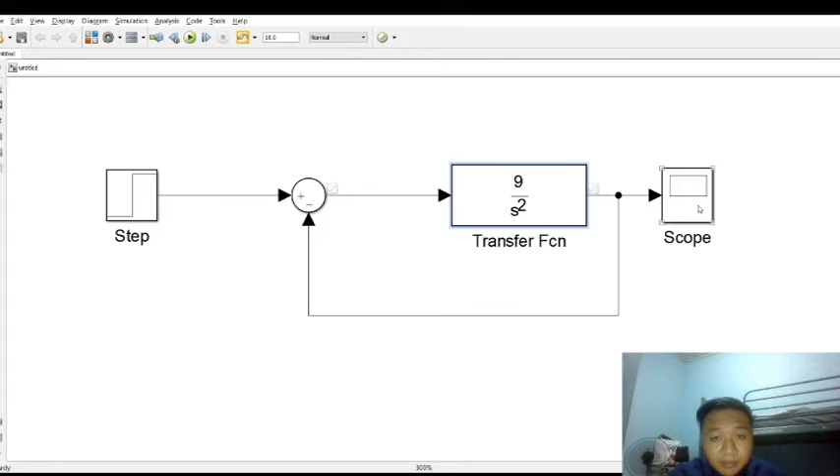Now we run the program, then we click the scope to view the output.

The graph has an equal shape like that. Okay, the transfer function scope is done.

Next we go to MATLAB.

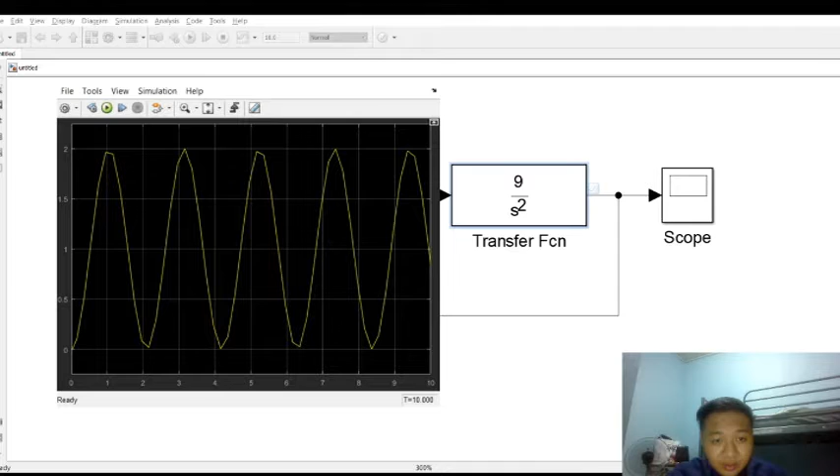Now in MATLAB we want to find the locus, the transfer function feedback, locus, step response, and step info. First of all, we want to start.

We type t equal tf for the transfer function, with numerator 9 and denominator 1, 0, 0. Okay, this is the transfer function.

Next, for the feedback, we use f equal feedback(t), using t because that is our transfer function, with value 1.

Okay, this is the feedback. Next we go to our locus. We type the rlocus command, feedback, to find the root locus of f.

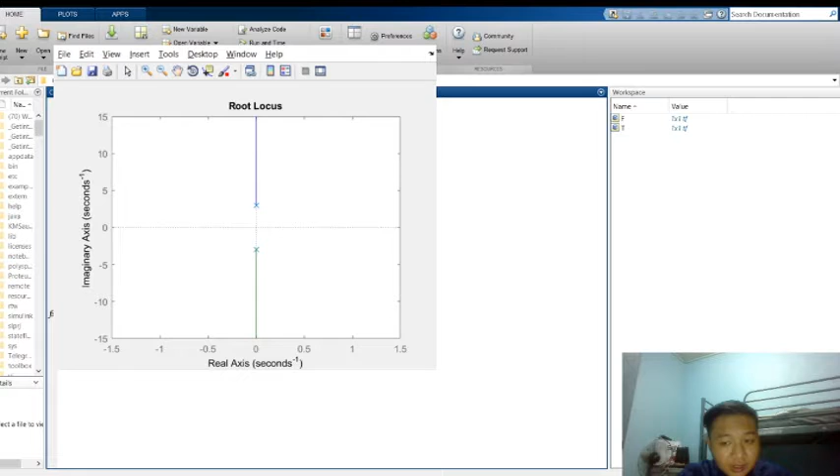Okay, now this is the locus. Next we go to the step response.

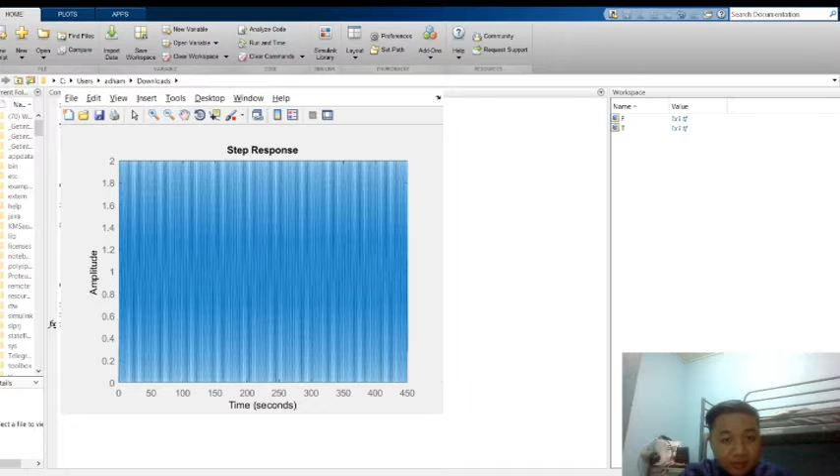This is the graph of the step response, and then we look at step info. We type stepinfo(f).

This is transfer function 1, and this is the answer from step info.

Rise time is 0.3473, settling time is NAN, settling min is 1.0851e-15, settling max is 2.0000, overshoot is 100.0000, undershoot is 0, peak is 2.0000, and peak time is 1.0472.

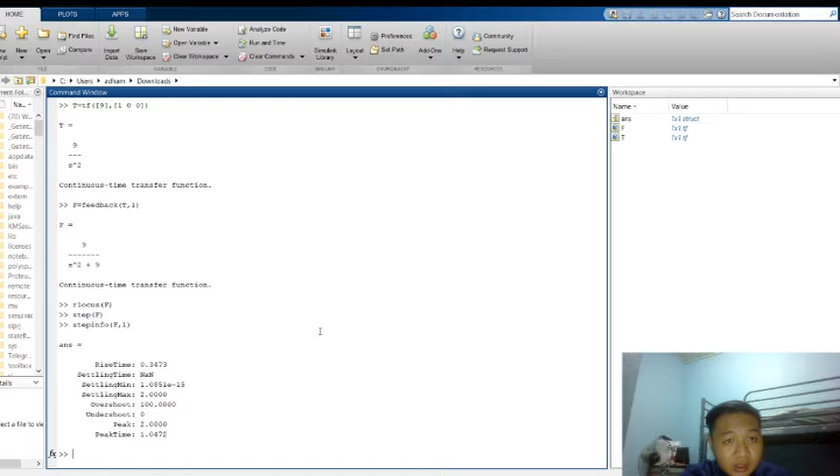Okay, thank you, that's all for me on transfer function 1. Next, we go to transfer function 2.

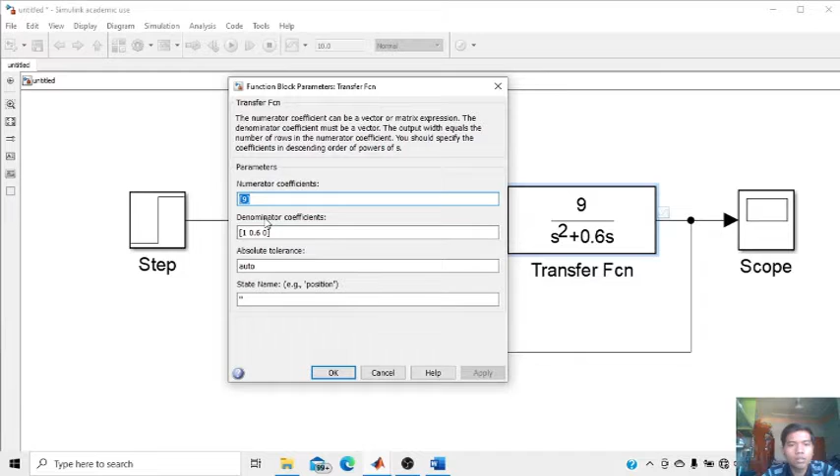In the numerator column, we put 9. In the denominator column, we put 1, 0.6, and 0. After that, we apply it and confirm.

To find out the step response, we run the block diagram, then click the scope.

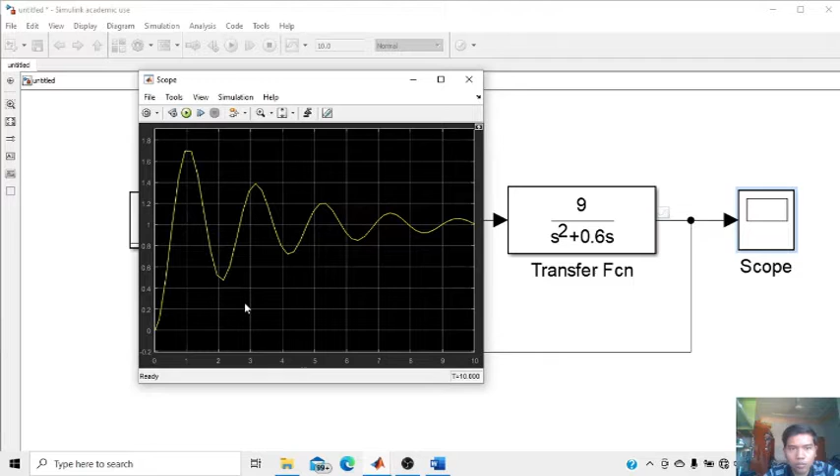After that, we find out the step response without the PID controller.

We type t equal TF with values 9 and 1, 0.6, 0. Then feedback(t, 1), and step.

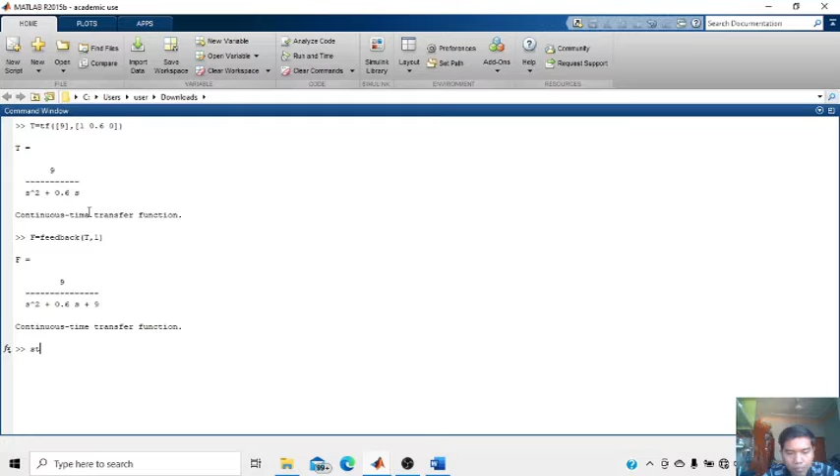We put grid on, and then we look back at the step response. This is the step response for transfer function 2 without the PID controller.

After that, we need to find out the overshoot, settling time, and steady state. To find the overshoot, we pick the peak response, and we can see the overshoot is 72.9.

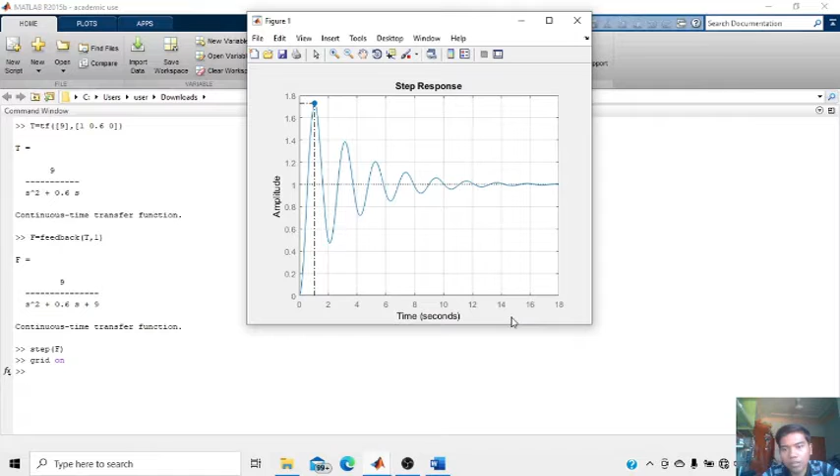To find out the settling time, we pick the settling time point. Settling time is 12.8 for this transfer function, and steady state for this transfer function is 1.

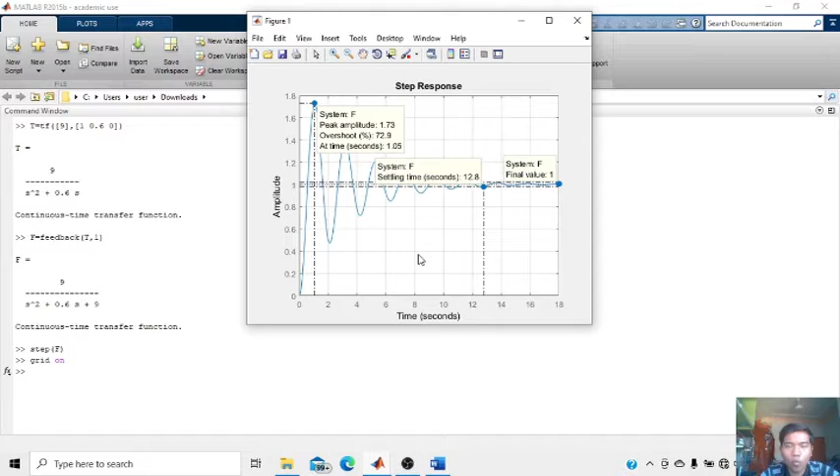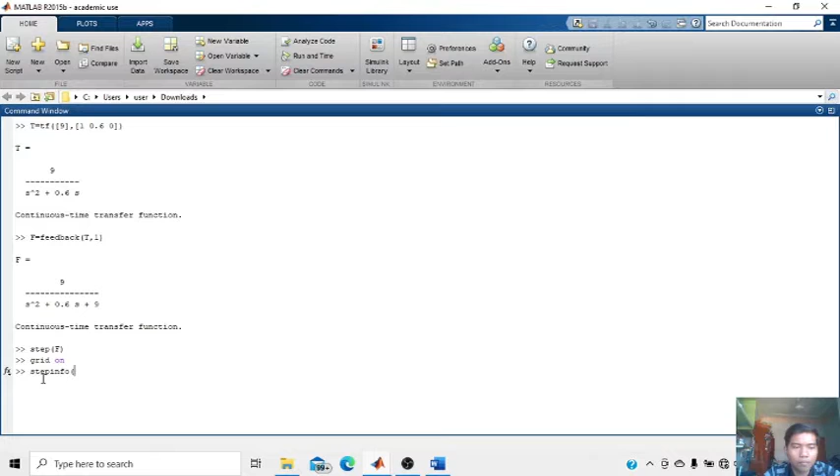But we can easily find the info without picking like that, just by using the stepinfo(f) command. Then we can see the settling time is 12.7910, and the overshoot is 72.9156.

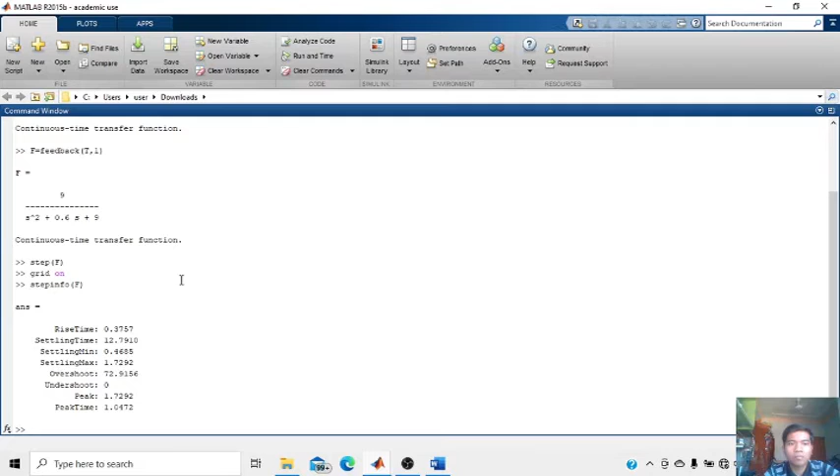Okay, for activity 6, we must try different values of KP and observe the overshoot, settling time, and steady state based on the graph.

First, num equal to 9, denom equal to 1, 0.6, and 0. GP equal to TF(num, denom), H equal to 1, M equal to feedback.

Then step(M), and we turn on the grid.

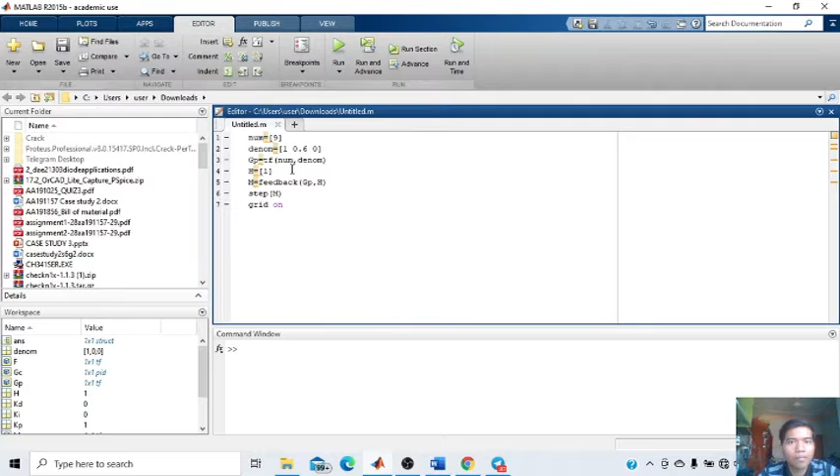After that, we run the command to find out the step response. This is the step response for transfer function 2.

The overshoot is 72.9. The settling time is 12.8. The final value, the steady state, is 1.

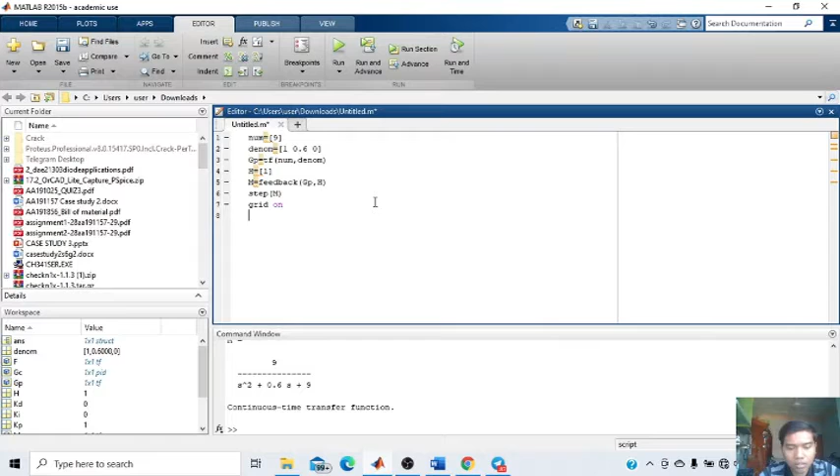After that, we change the KP value. We put the KP value to 0.5, KI to 0, and KD to 0. GC equal to PID, KP, comma KI, comma KD.

After that, MC equal to feedback GC, GPH. Then step MC, grid on. We run the command back.

Okay, this is the step response for transfer function 2 with the KP value is 0.5. As you can see, the overshoot decreased to 63.8. The settling time is 12.3 seconds, and the steady state is still the same, 1.

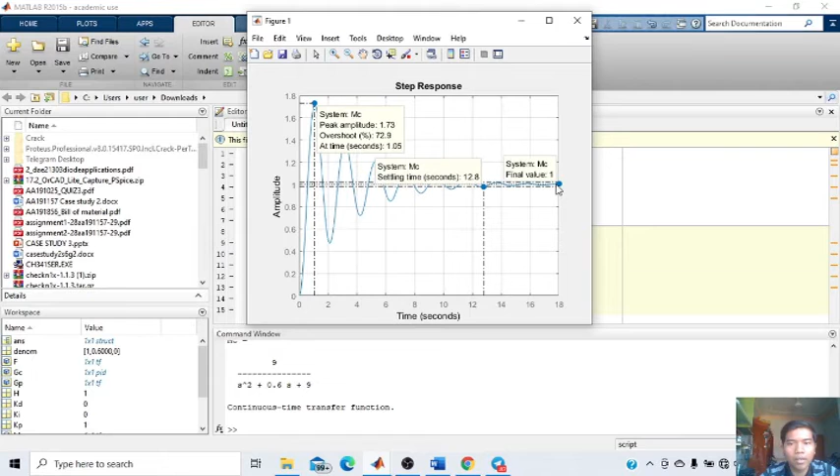Let we change the KP value again to 1. We run it back. Turn on the peak response, settling time, and steady state. Find out the overshoot, settling time, and final value. For the transfer function with Kp equal to 1, overshoot is 72.9, settling time is 12.8 seconds, and steady state is 1.

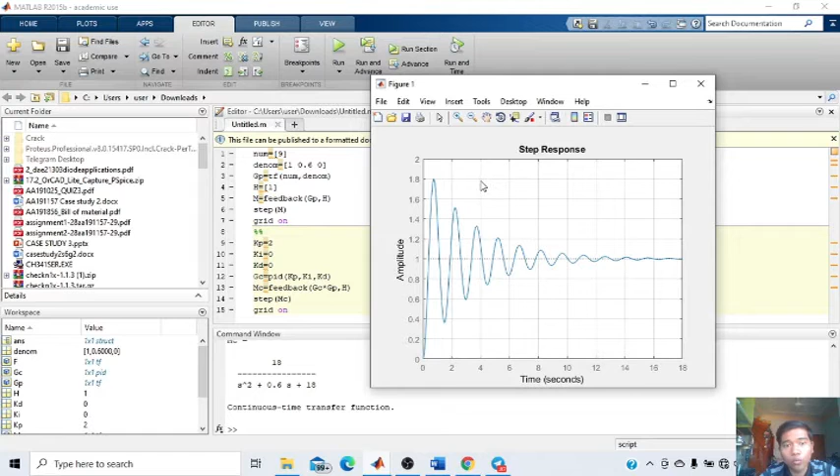Next, we change the value to 2, and we run the command back. This is the step response with Kp equal to 2. We turn on the peak response, settling time, and steady state. For the Kp value equal to 2, the overshoot becomes 80%, and the settling time is 12.7 seconds, and the steady state is 1.

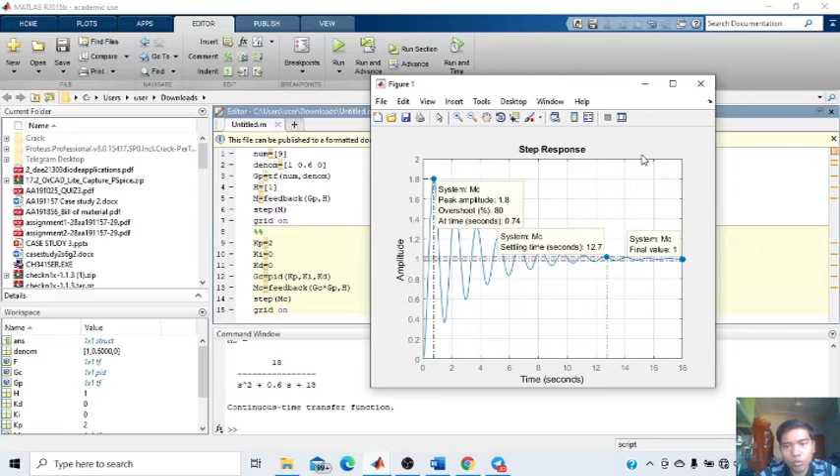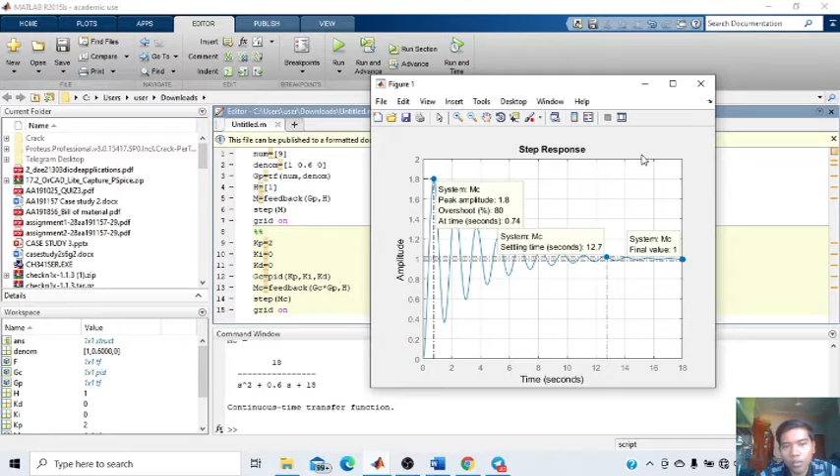Now for transfer function number 3, it is 1 over 0.8 s squared plus 2s plus 200. For the transfer function, it must be on a plant. So to find the graph, we must highlight this graph and select the data inspector. Then we run the circuit, and we get the graph, and this graph is underdamped.

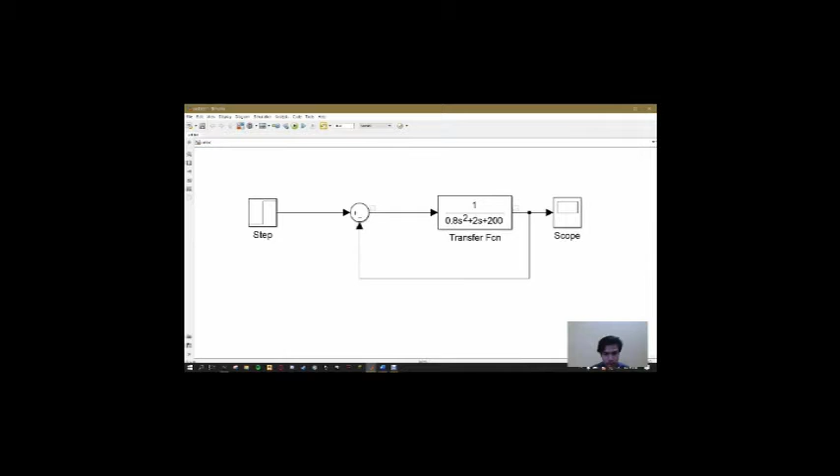Next, to find the original closed loop control system, the first one is overshoot. We will get 78%, and then for the settling time we get 3.02 seconds, and the final value is 0.00498.

Next, the PID control closed loop control system. For transfer function number 3, we use Kp equal to 40, KD equal to 20, and KI 0.1, 0.2, and 0.3.

The overall for KI value 0.1, 0.2, 0.3, we don't get any overshoot value, but the settling time for KI 0.1, we get 0.009. KI equal to 0.2, settling time we get 0.004. And KI equal to 0.3, we get 0.003. For the steady state, all KI equal to 0.1, 0.2, and 0.3, we've got 1.

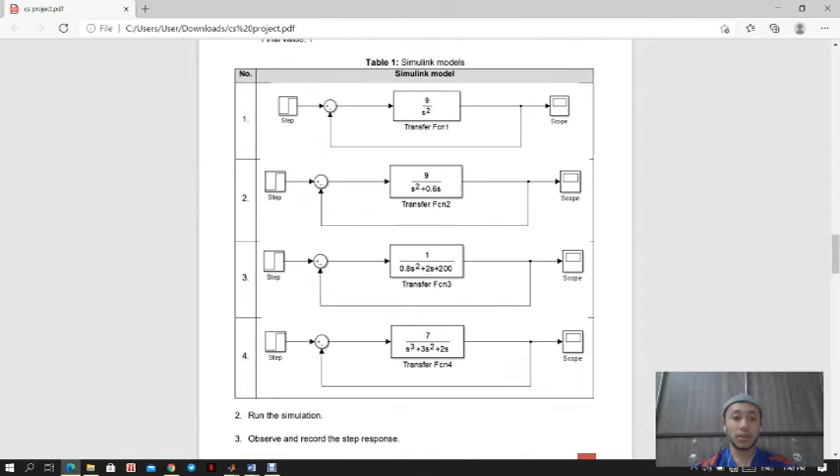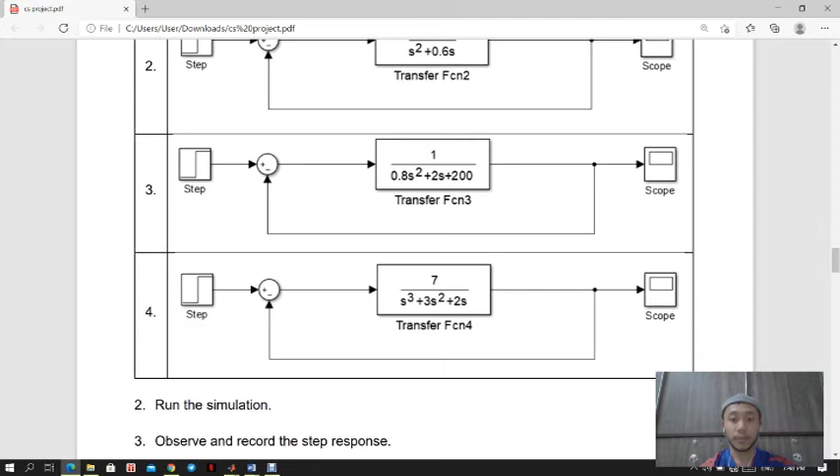So here we can see the block diagram of transfer function 4. Okay, and then we look at the Simulink model and we write the transfer function here in the box, and the next thing we must run the simulation.

Okay, after we run, we click at the scope to see the step response. So the result is like this. This shows that the graph is unstable. Tidak stabil lah, unstable. You can see here.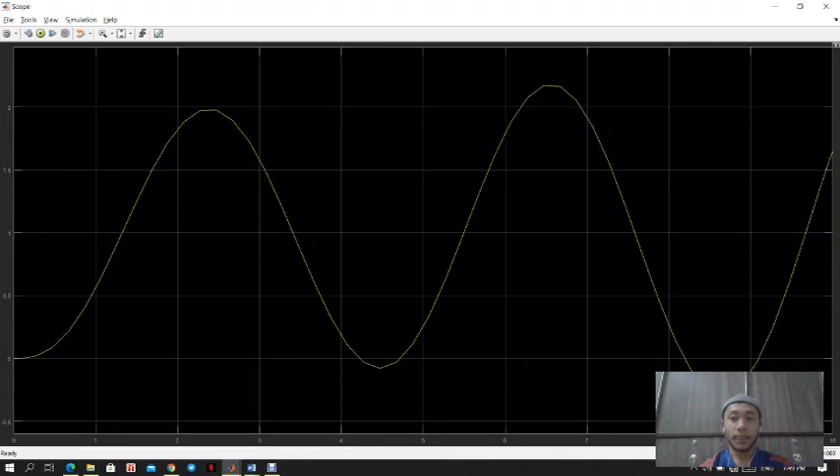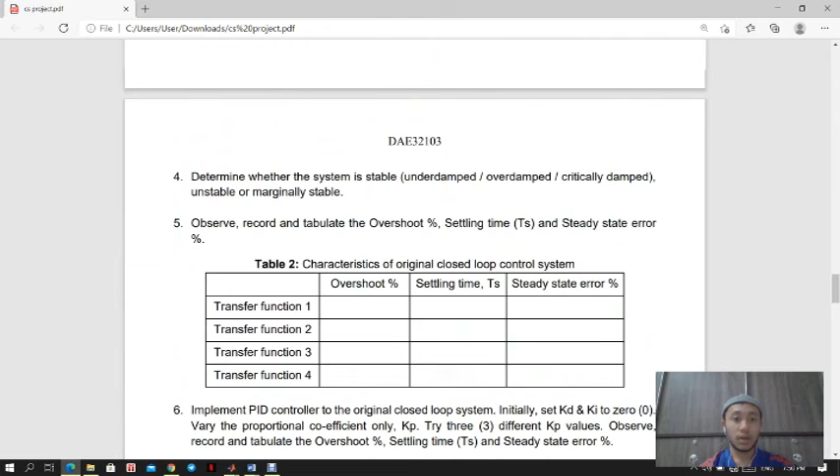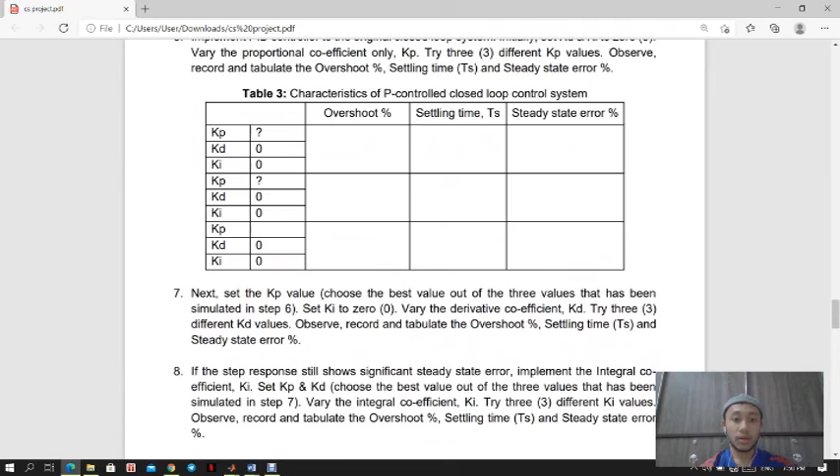Next, we move to the characteristics of the original closed loop, P control, PI control, and PID control. Okay, next we look at the command.

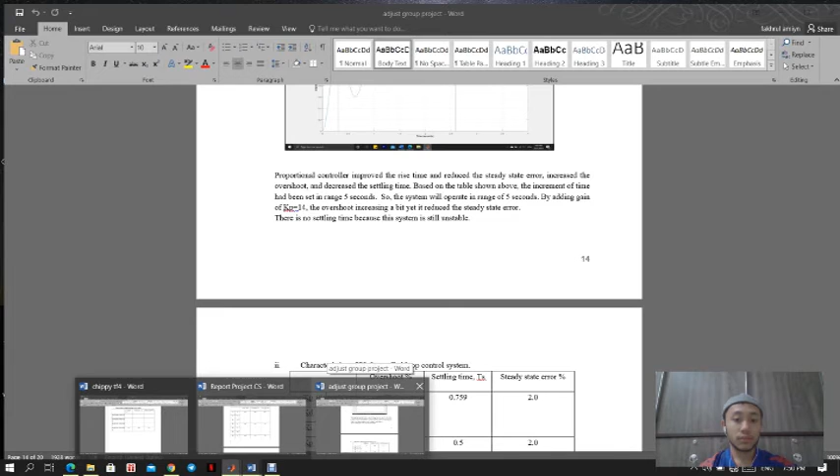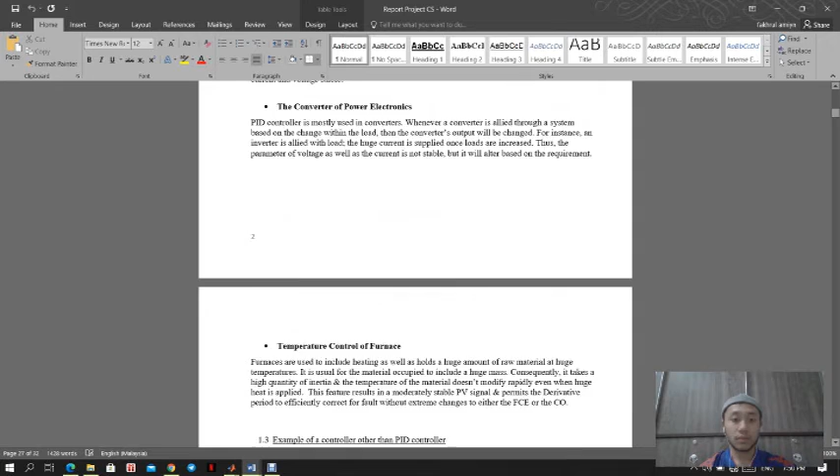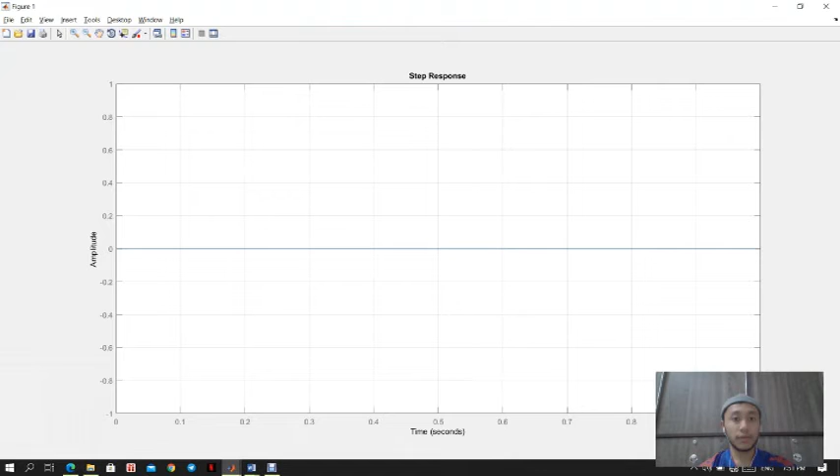For the characteristic of the original closed loop control system, we just run it. We can see this infinity value. Then we record in the table of transfer function 4, infinity.

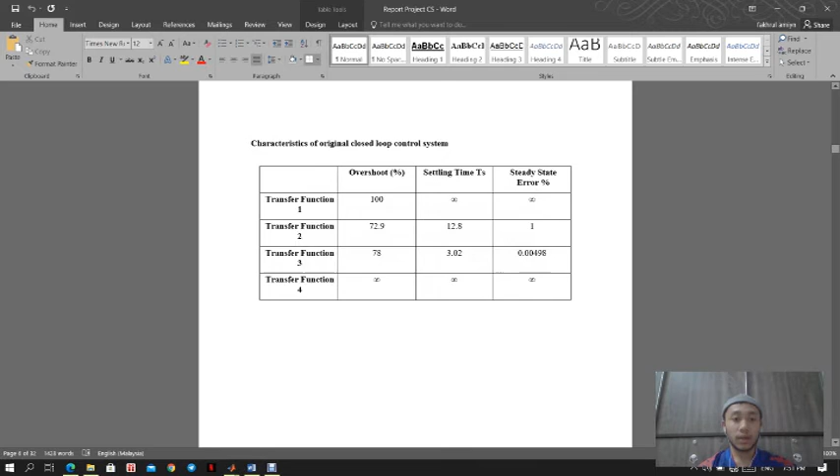Next we move to the characteristic of the P control. We put the value of transfer function 4, here is 20, 40 and 60 for the P control. So this is the value.

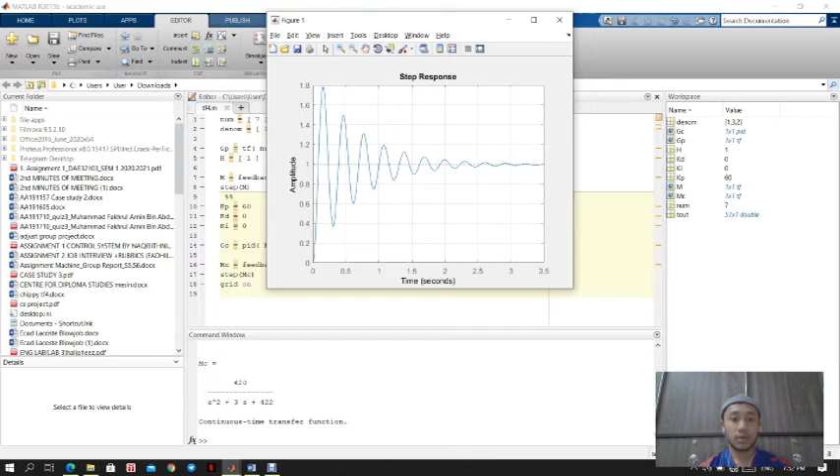Then we change to 40, then we run, we got this. And 60 we run, we got this.

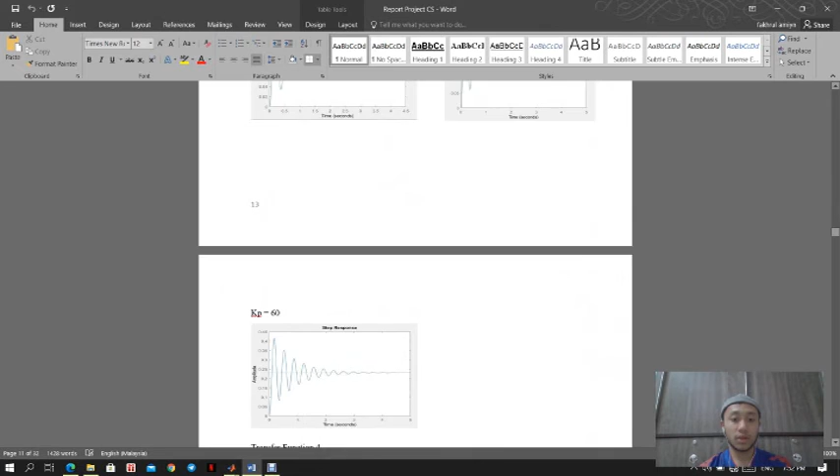After we done for the P control, we move to the PD control. For the PD control we put the value, KP all 40 and KD 10, 20 and 30. This KP we put all 40, let's change it here to 10, then we run.

And then we get this, 20, and then we run, then we get this, 30, we run, and then we get the result, the step response is here.

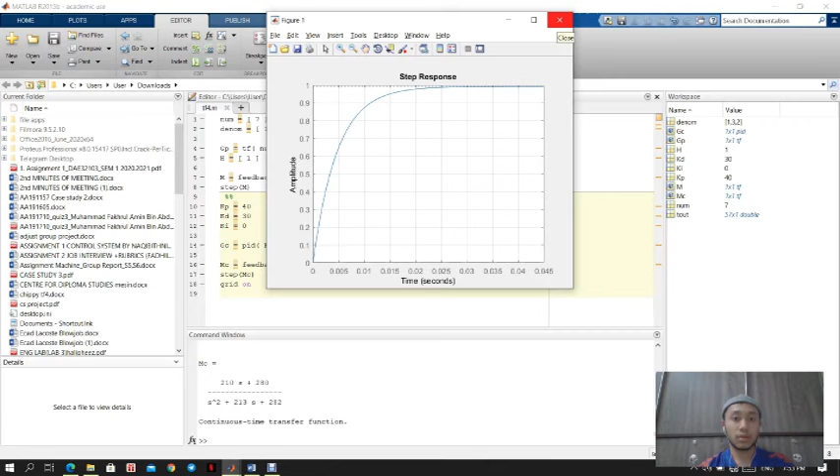Here we can see that peak response, there's no peak response, we get the settling time, and then we go to the steady state error, like this, 0.983.

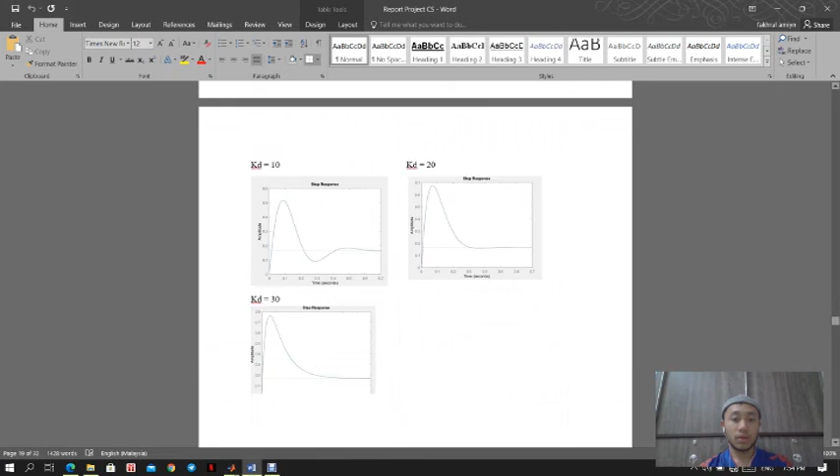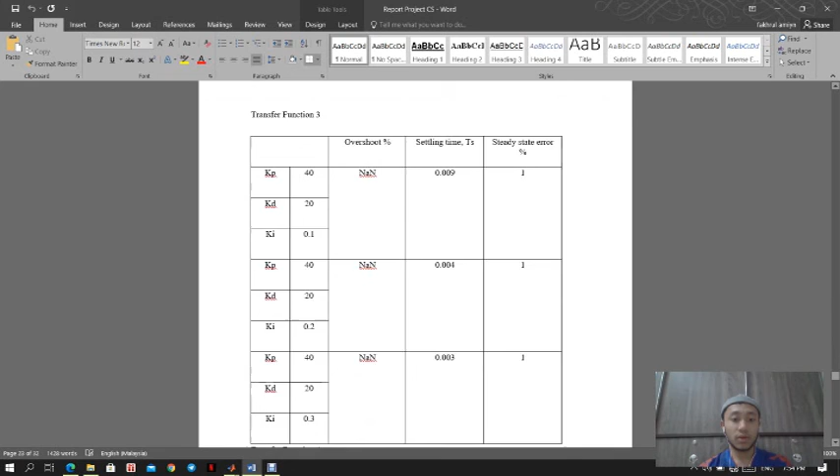Okay, then we move to the characteristic of PID control closed loop control system. We get to see the transfer function 4. So we use KP all 40 and KD all 20. We just use 700, 800 and 900. We use KD all 20, and then we have to change here to 700, and go to run.

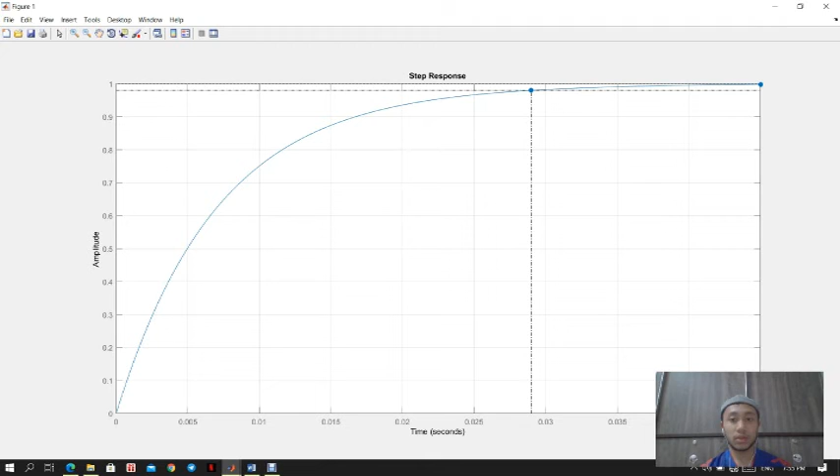So we got to see the peak response, settling time, and steady state. So we can see here system value is 1, and we change to 800. Let's run. And we get the same here, we get to see the response, and then settling time, we get to see the steady state.

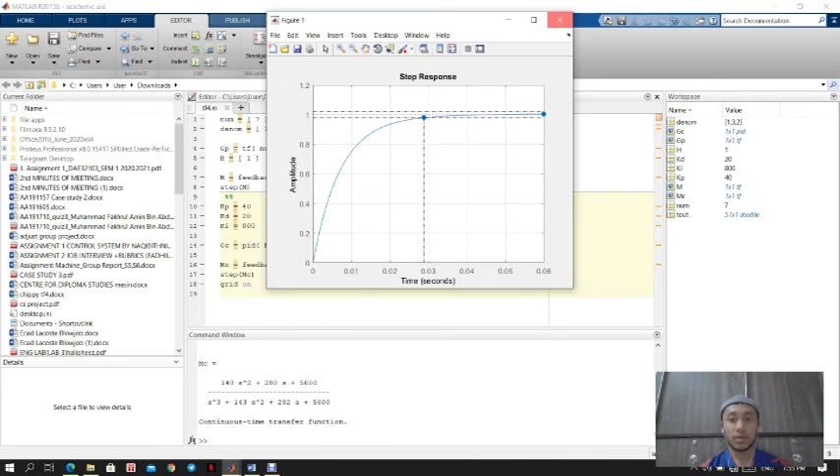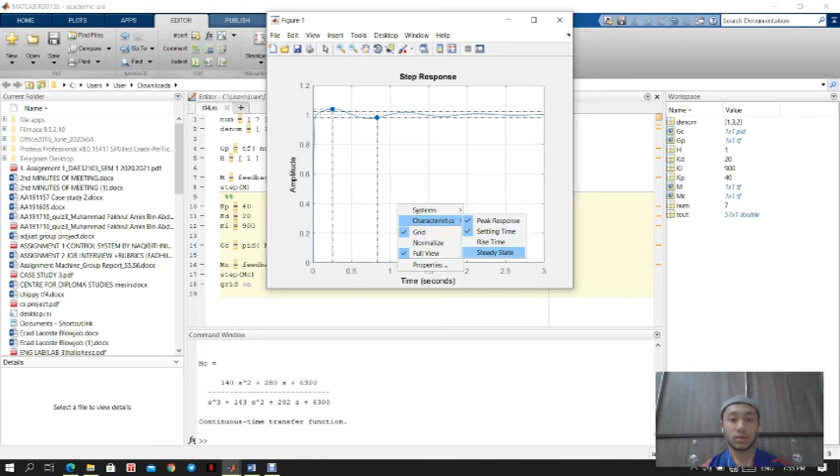And the last is 900 for the PID controller. So we run, we get this, and we get this peak response here, that settling time and steady state. So this average is below 5 and below 2, and this below 2. Below 10, below 5 and below 2.

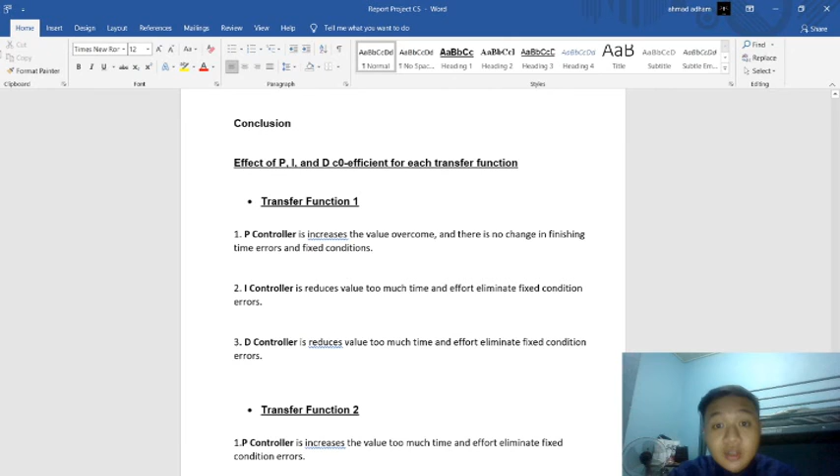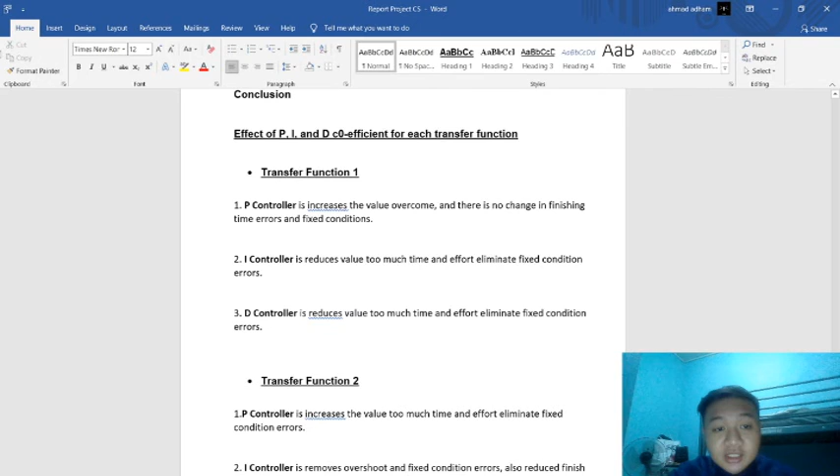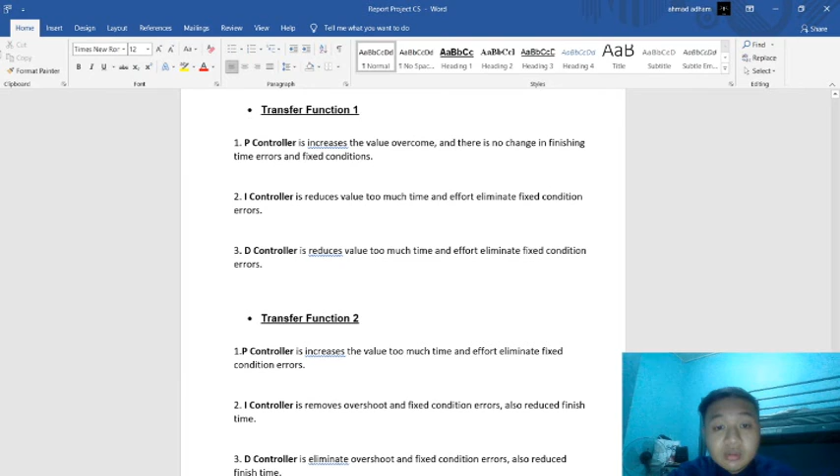Okay, now I will present the conclusion. Conclude the effect of PID coefficient for each transfer function. For transfer function 1, P controller increases the overshoot, and there is no change in settling time, errors and steady state condition. Second, I controller reduces overshoot, takes too much time and effort, and eliminates steady state condition errors. Third, D controller reduces overshoot, takes too much time and effort, and eliminates steady state condition errors.

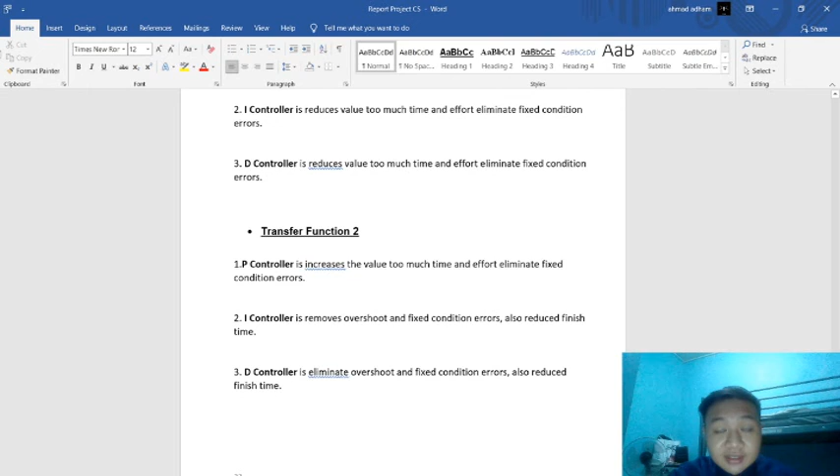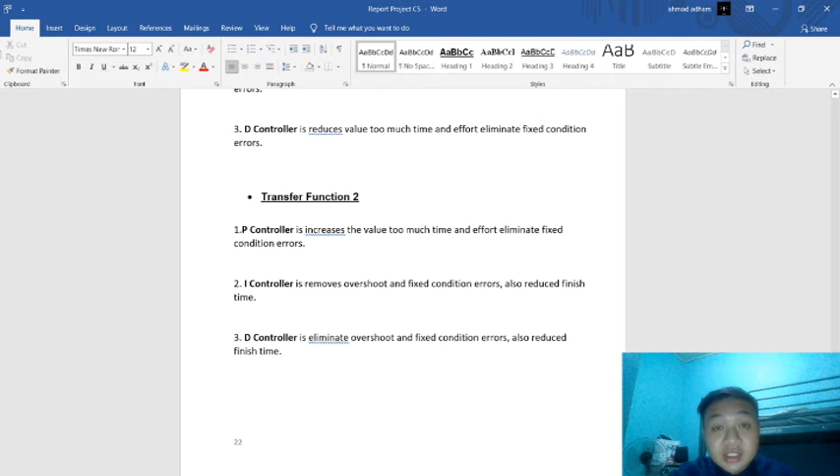Next, transfer function 2. P controller increases overshoot, takes too much time and effort, and eliminates steady state condition errors. Second, I controller removes overshoot and steady state condition errors, also reduces settling time. Third, D controller eliminates overshoot and steady state condition errors, also reduces settling time.

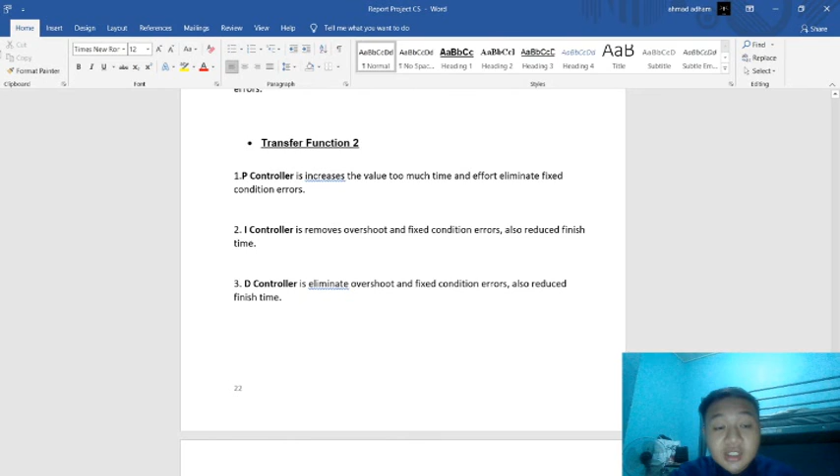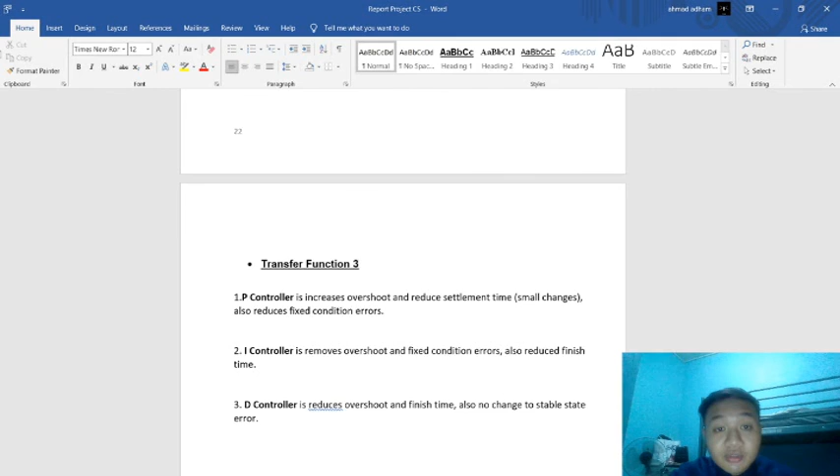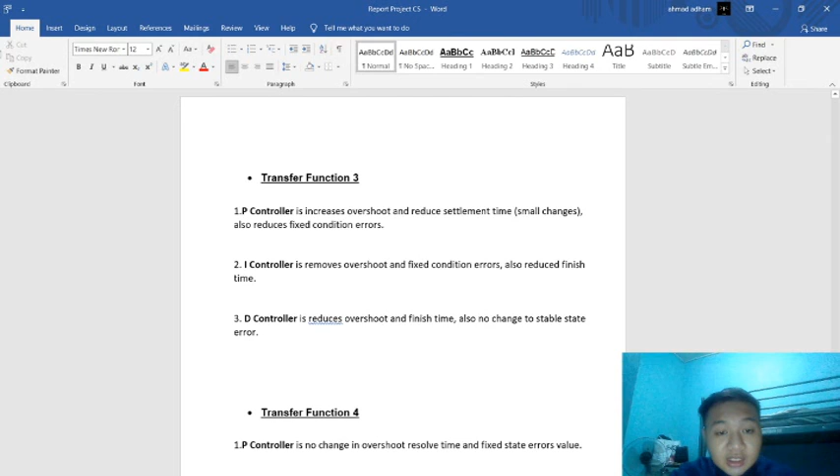Okay, next, transfer function 3. P controller increases overshoot and reduces settling time, with small change, also reduces steady state condition errors. I controller removes overshoot and steady state condition errors, also reduces settling time. Third, D controller reduces overshoot and settling time, also no change to steady state error.

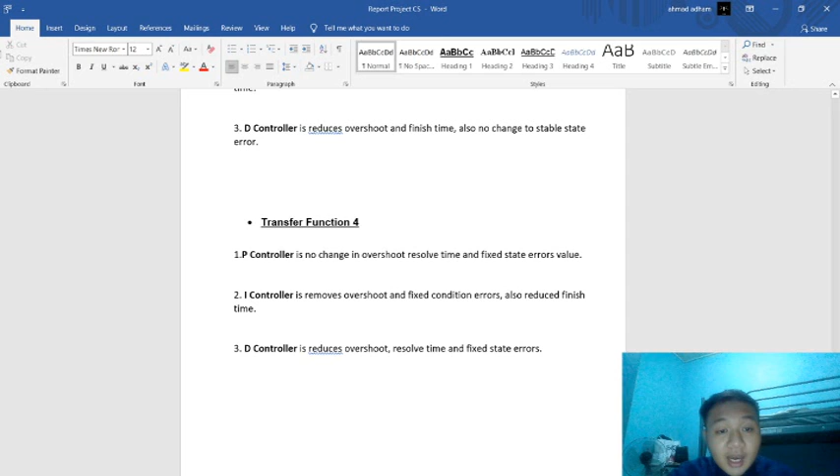Okay, transfer function 4. P controller shows no change in overshoot, settling time and steady state error value. I controller removes overshoot and steady state condition errors, also reduces settling time. D controller reduces overshoot, settling time and steady state error.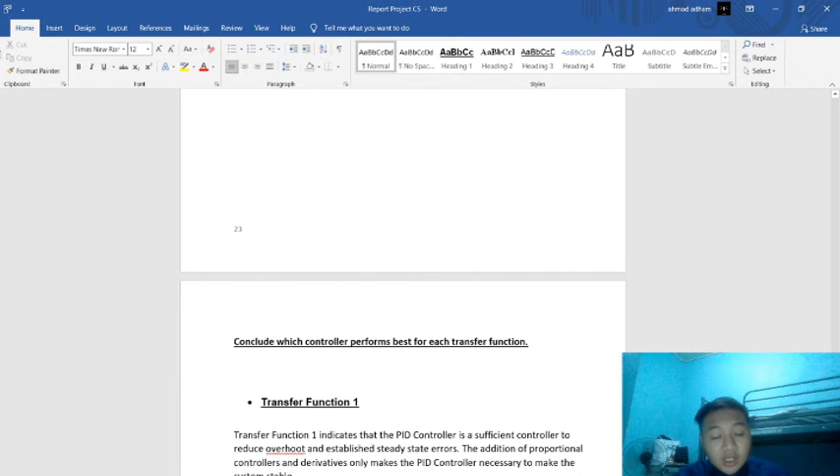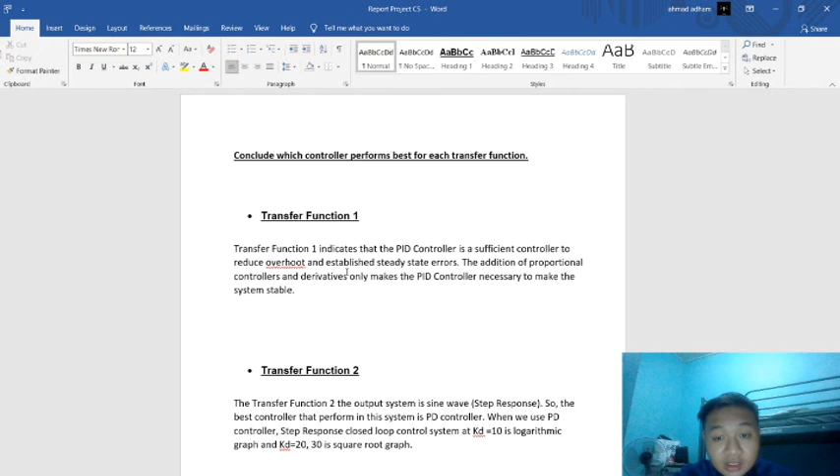Okay, next, conclude which controller performs best for each transfer function. For transfer function 1, it indicates that the PID controller is a sufficient controller to reduce overshoot and establish steady state errors. The addition of proportional controller and derivative only makes the PID controller necessary to make the system stable.

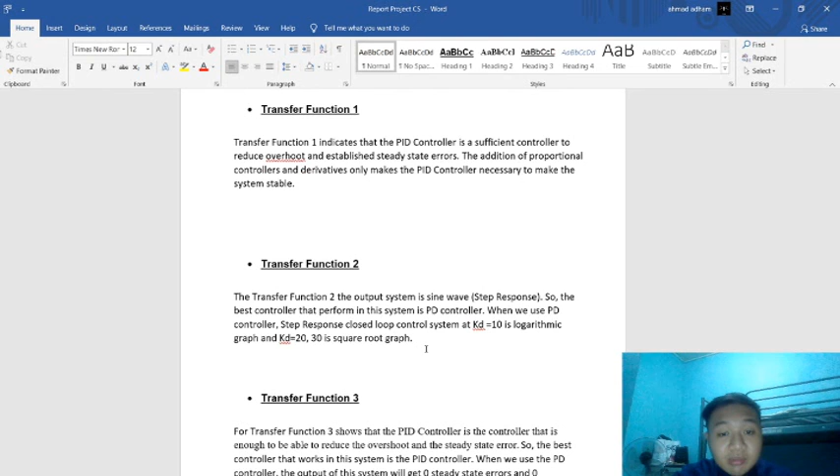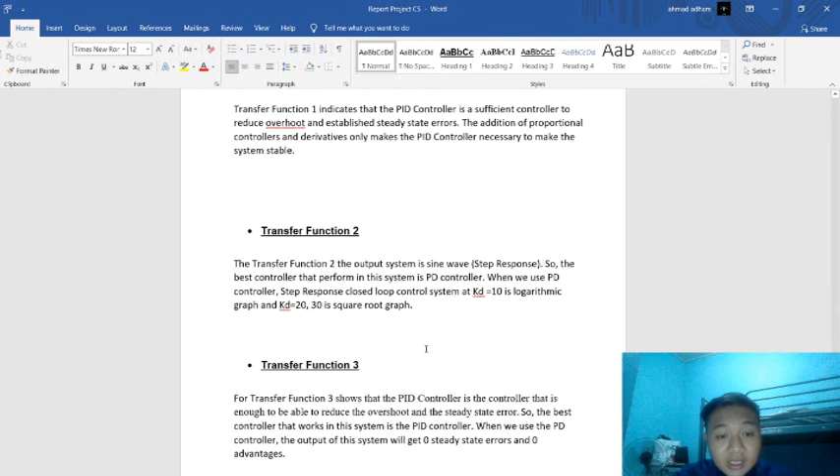For transfer function 2, the output system is a sine wave-like step response. So the best controller that performs in this system is the PD controller. When we use the PD controller, the step response of the closed loop control system at KD10 is a logarithmic graph, and at KD20 and 30 it is a square root graph.

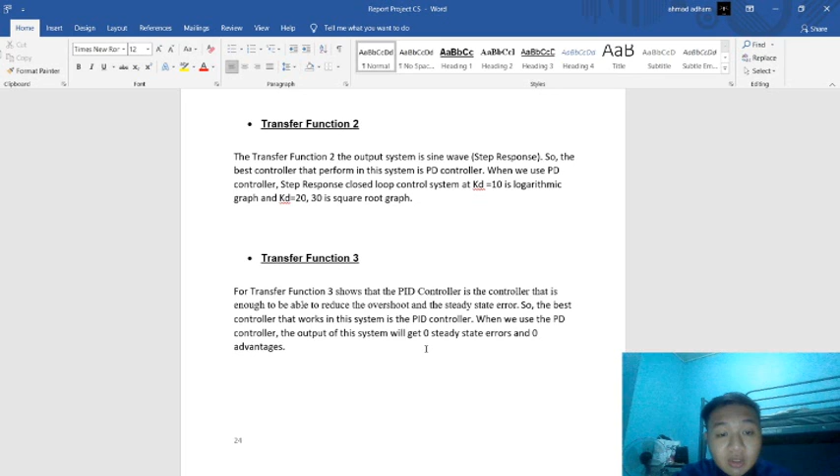Transfer function 3. For transfer function 3, it shows that the PID controller is enough to be able to reduce the overshoot and the steady state error. So the best controller that works in this system is the PID controller. When we use the PD controller, the output of the system will get 0 steady state error, 0 overshoot.

Okay, lastly, transfer function 4. It indicates that the PID controller is the most suitable controller to be able to reduce overshoot and steady state errors, and the system is very stable. Values are Kp is 40, Kd is 10 and Ki is 0. The non-PID controllers, which are P and PD, are only able to reduce settling time and reduce overshoot, but cannot make the system stable. Okay, that's all from us.